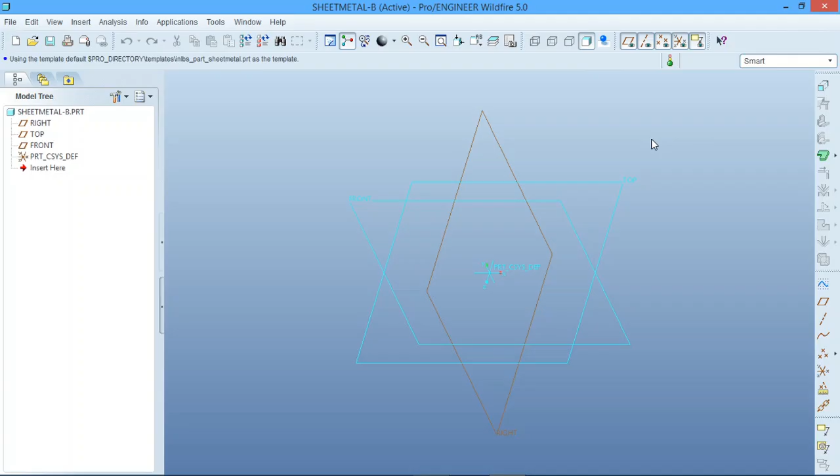First thing we're going to do is we're going to select our flat feature. Okay, so we're going to select sketch. Then we're going to select our datum plane. We're going to say sketch as always. Okay, we're going to do our center lines.

We're going to do a square as we've done before. I'm going to say select. We are going to say 300 by 300, just to keep it all symmetrical. I'm going to say okay.

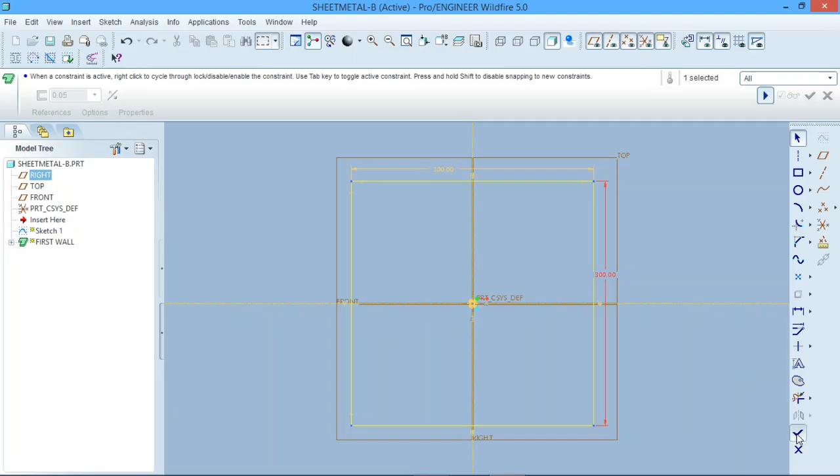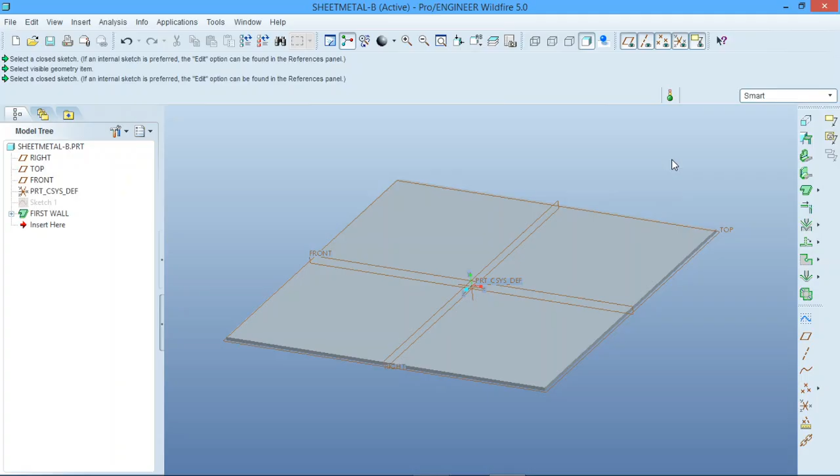Now the next thing we're going to do, I'm not going to run through the flat and the flange because we did that in part A. Or maybe I'll run through it later, but first we're going to do our bending tool. So what we're going to do is select bend, angle, regular. We're going to say done.

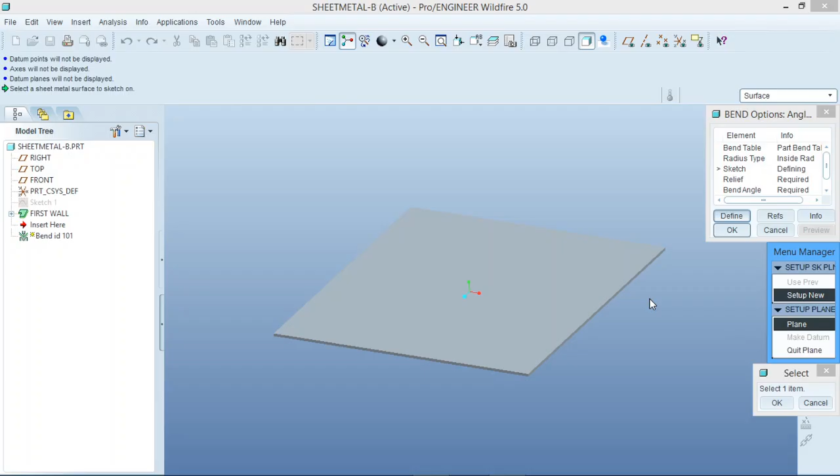We're going to say part bend. Say okay. Say inside radius, yes. Okay, now we're going to select the plane, select this plane here. We want to sketch that direction, so we're going to say okay, or if I didn't want to, I would say flip. Okay, we say okay. Which view would we like? Default, because that's where we're going to do our sketch.

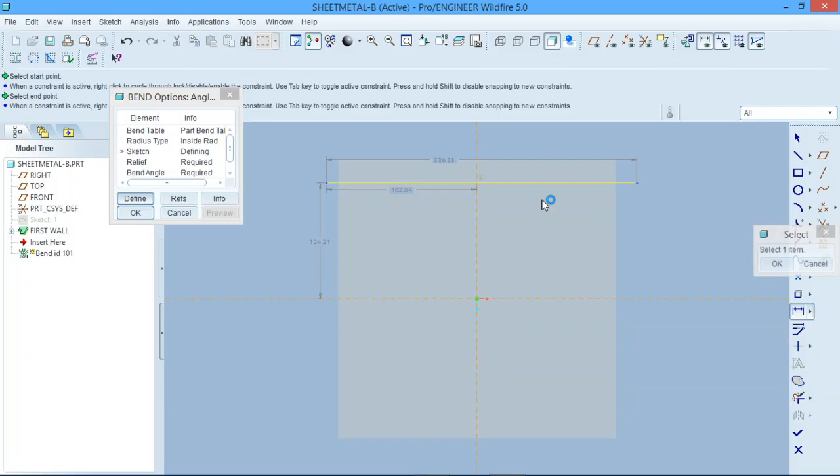Okay, so now I'm going to do a normal sketch. Now I need to put a dimension there to there, call it 25, say okay, say I'm happy with that. It is now asking me which side of the entity to create the feature, so that side. I'm going to say okay.

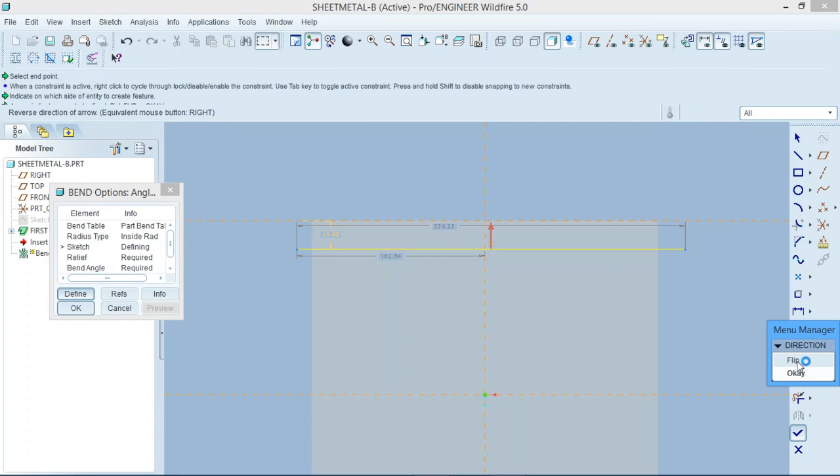We need to know which area will be fixed, so the arrow indicates the area to be fixed, so not that side. We want this to stay and the other side to bend, so we're going to say flip. We're going to say okay. No relief or with relief, well not always but with relief. Done. Rip relief, yes. Done.

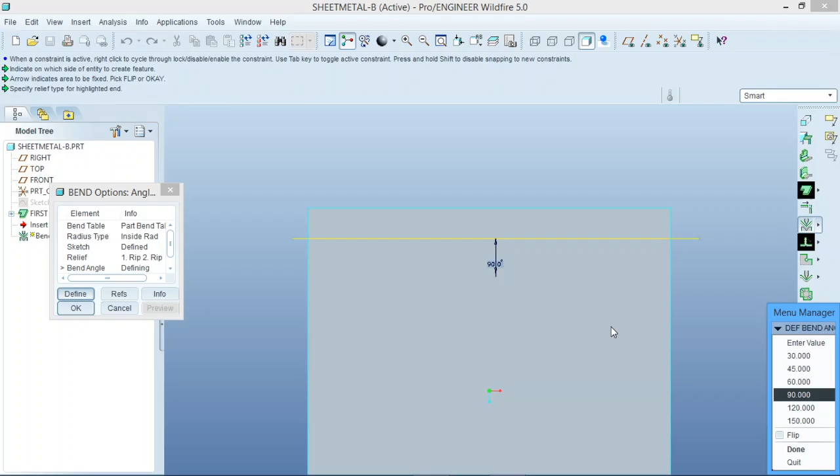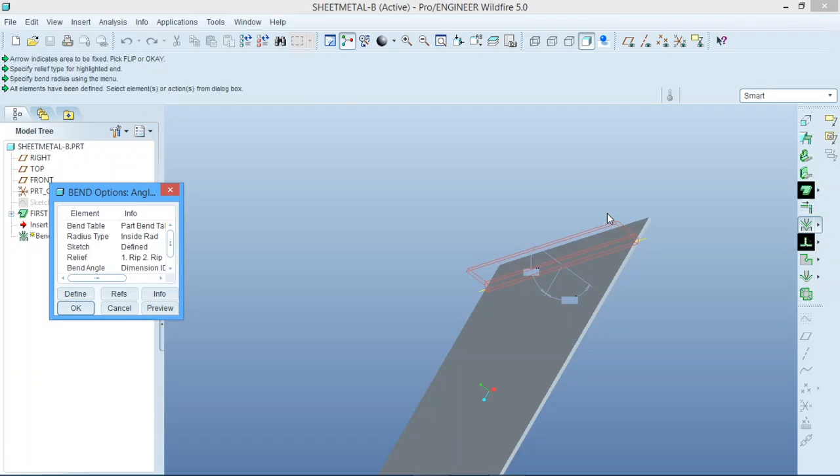90 degrees, yes, we want it 90 degrees. Let's see here. Now we're going to flip it the other way because we want it up. Say okay. We want the radius of the bend to be the thickness of our steel. And we can say preview. And there you can see there's the preview. So now all we do is we say okay.

That's very simple, nice little feature. Now I can show you your flat feature. So now we click here.

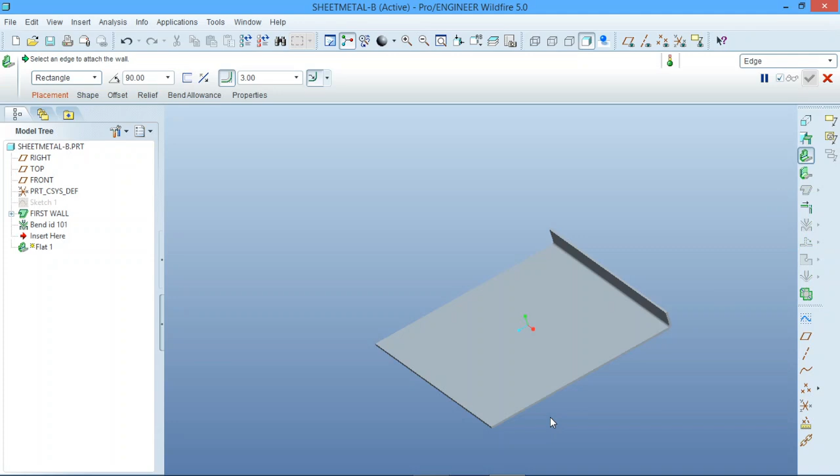We can use this. We go 25 here again. Okay, our radius is now inside, so what we want to do is we want to shift it to there.

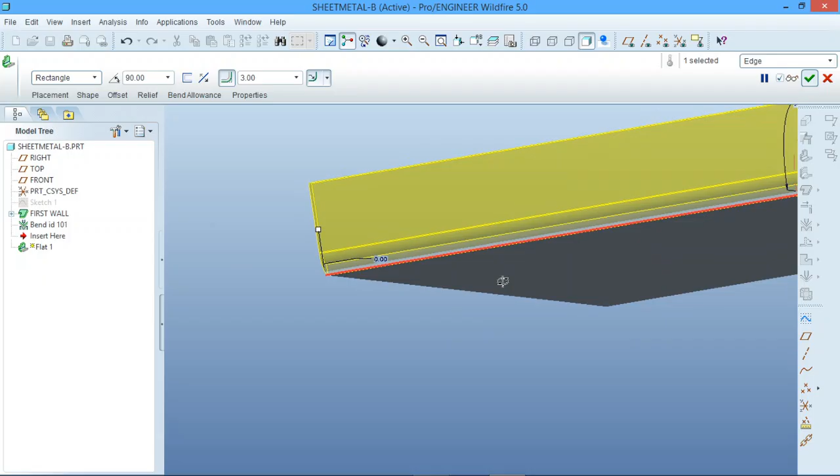We are going to have same height, same angle, and now we're going to do the other sides. So I'm going to select there to move it to the other side.

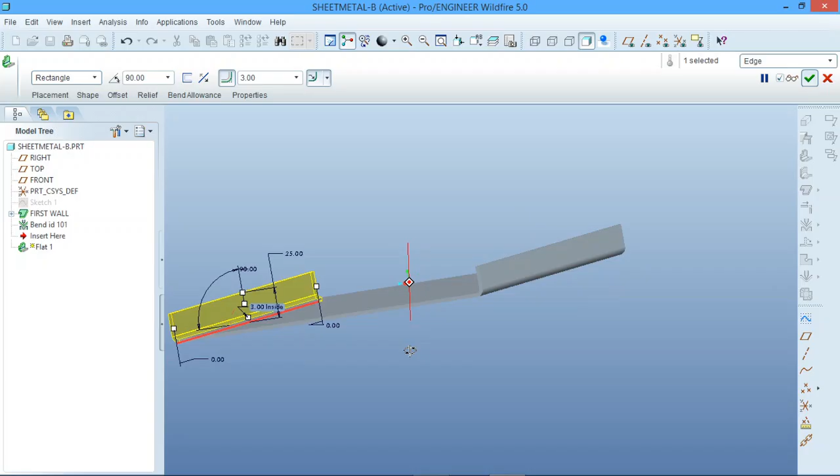Okay, we're going to say okay. Now those two sides should be identical.

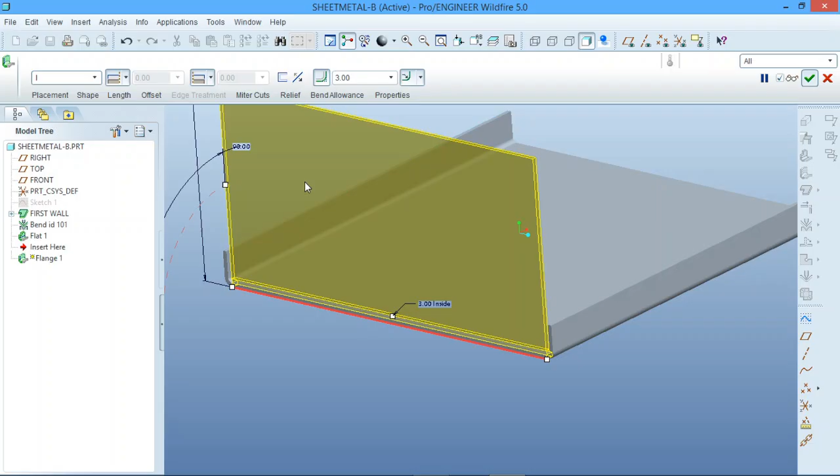Okay, so now the next one we're going to do is we are going to use our flange feature. So we're going to click there. Will give us that. Same thing, we just need to change that radius.

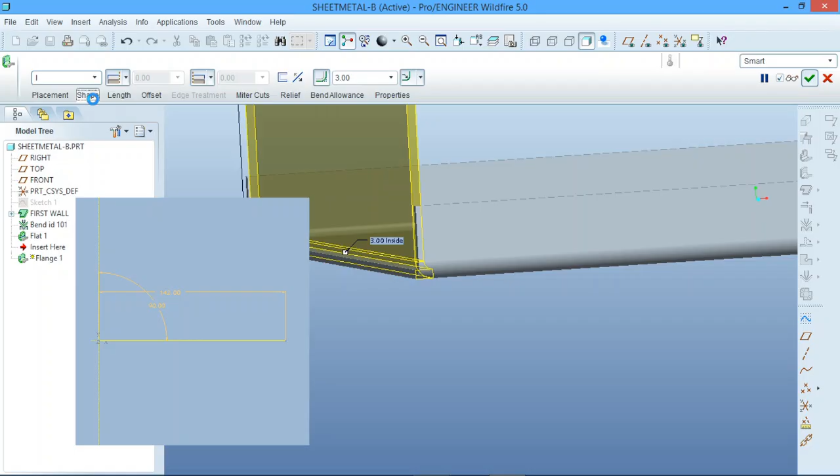As you can see there, it's toggling that radius. Okay, we want the shape, so we can say sketch, then we can say sketch, and we can give it the shape we want.

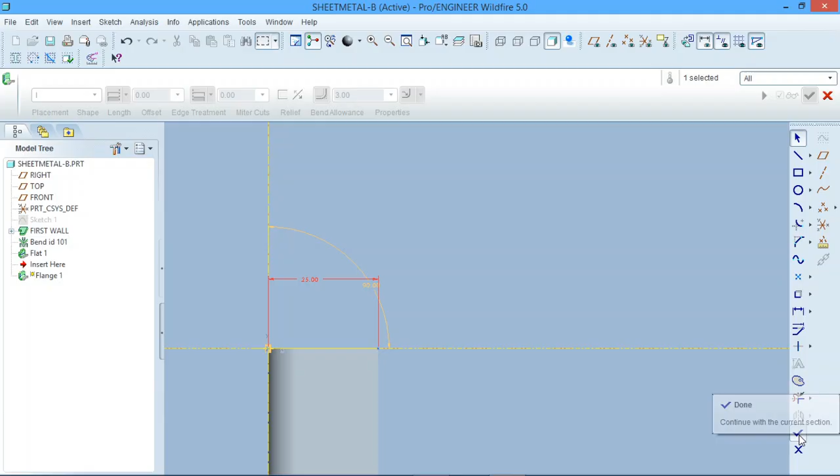So we want it 25 as per the other ones. We still want it 90 degrees. Then we say okay. Okay, now we are going to say okay.

Now we've got that flange. We are going to say flange. We're going to say insert. Edit. We're going to say mirror.

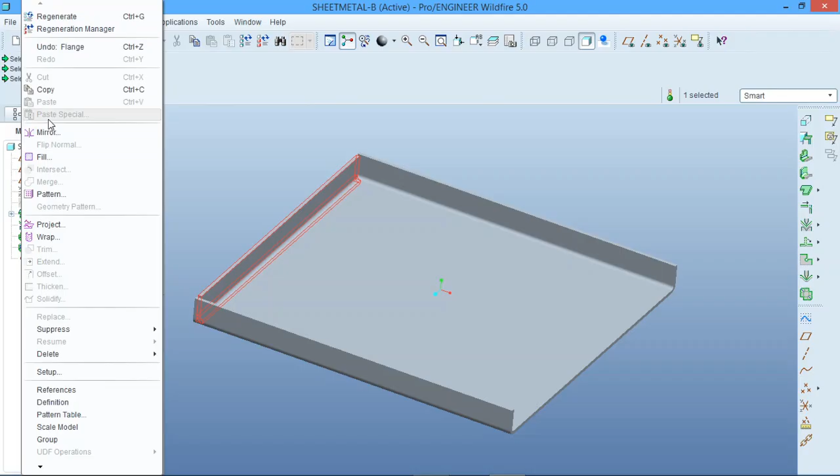I'm going to put our datums back on. I'm going to click on this datum plane. And we're going to say okay. And boom. Another one. Simple, easy.

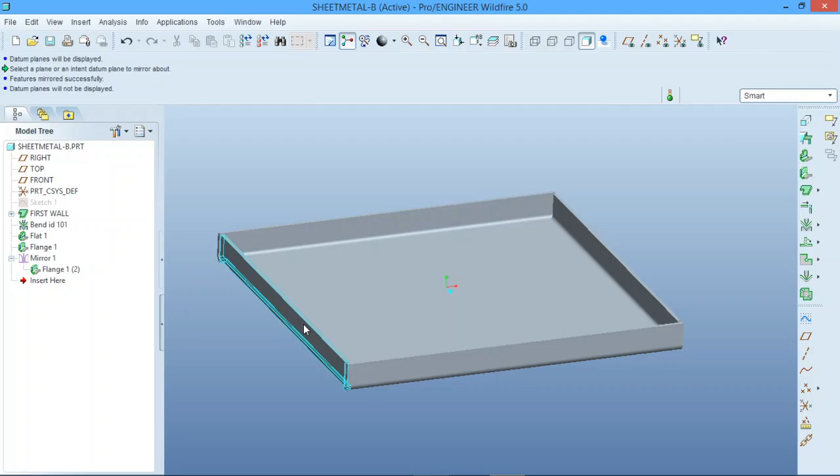Okay, so remember, this one now mimics this one. So if I go to this one and I say edit definition, and I change this to 45, okay, look there, changes it the same.

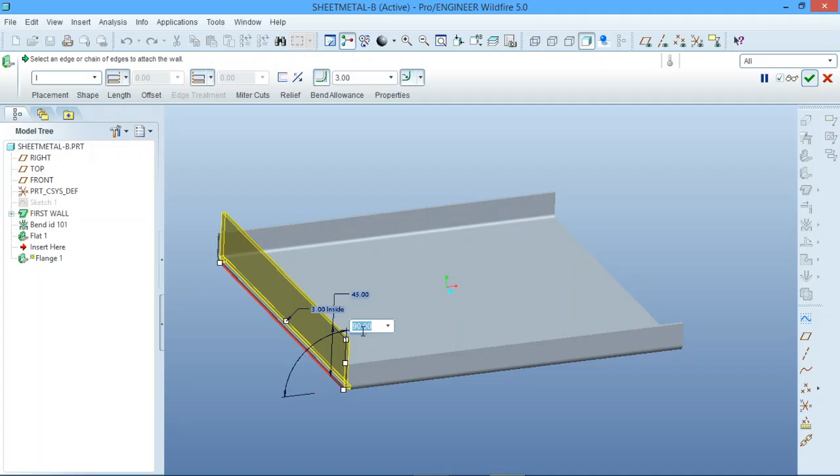If I go edit definition and I change this to 60, and I say okay, that one is also going to be 60.

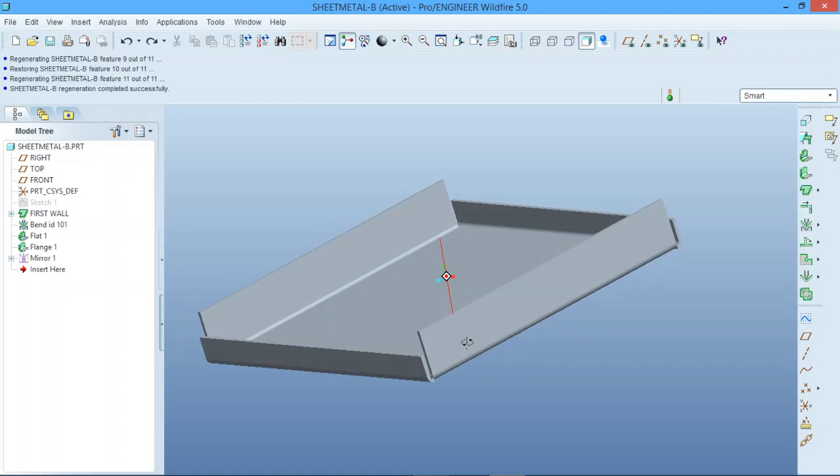Okay, so now we're going to go back to the 90. Okay, as you can see, there's our mirror feature and our flanges and our flat.

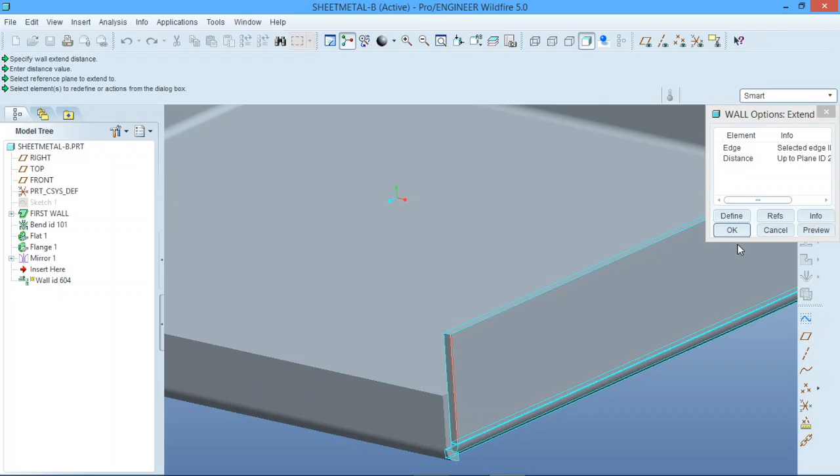So now if I go define edge, define, and I go instead, and I say distance, define, we can go up to a plane. I can select the back of that and we can say okay, and now we extended it to the other one. As you can see there, see the difference between the two.

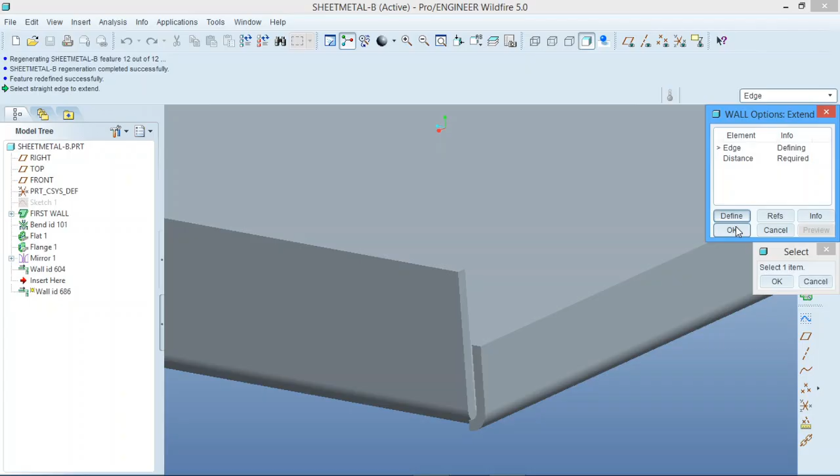So again, all I do is I go this side, I select my extend feature, I select this edge, I say up to plane, I select the inside of this, and I say okay, and you can see there again it has extended it to there.

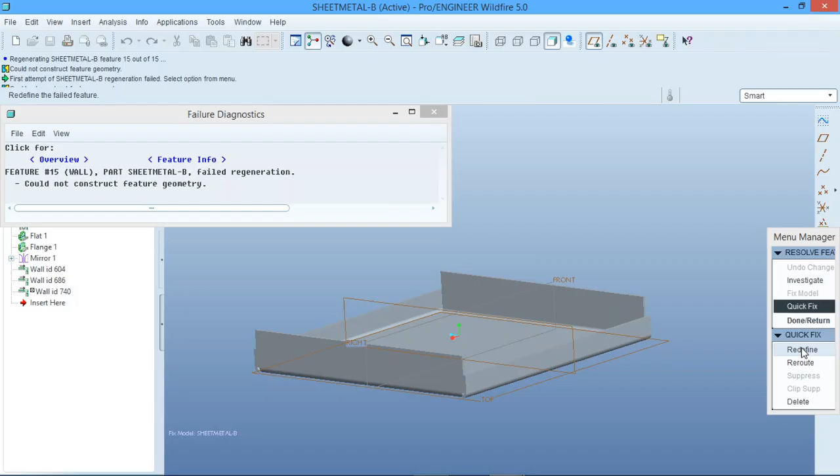So now if we go click on that one and we go edit, mirror, and we select that plane again, say okay, so we go this feature here, we say this feature here, and we say okay.

Simple. Same with this one. We go edit, mirror, select this, say okay.

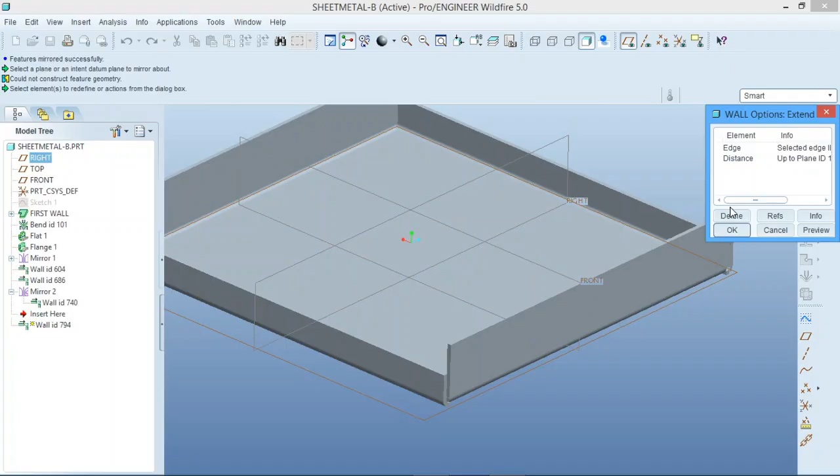Define the edge, define, this one, distance, define, inside, say okay, and there you go. So there's your extend feature.

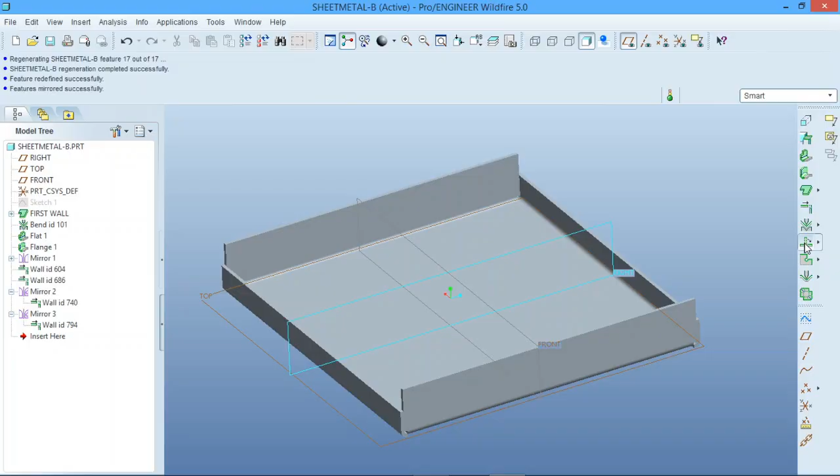Now the next one we're going to do is going to be your unbend feature. So we're going to click here, we're going to say regular unbend, we're going to click here, we're going to say done. It's going to say select a plane or edge to remain fixed while unbending, so we're going to select this one.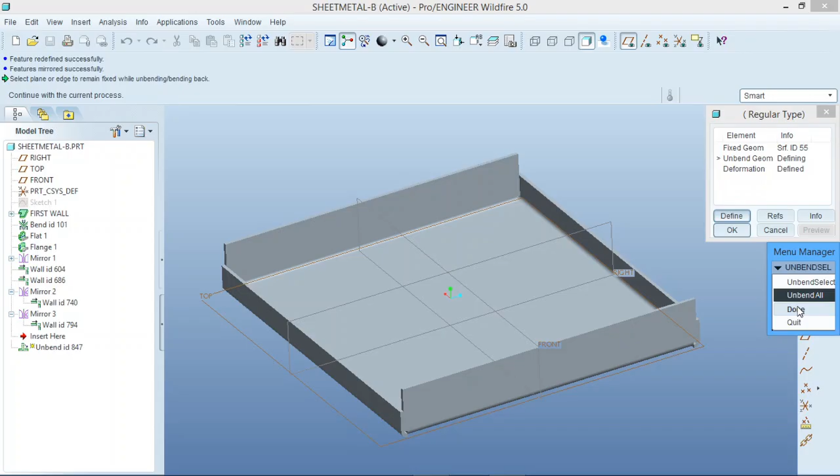We're going to say unbend all, okay, and we're going to say preview, and there would be your preview, so we're going to say okay.

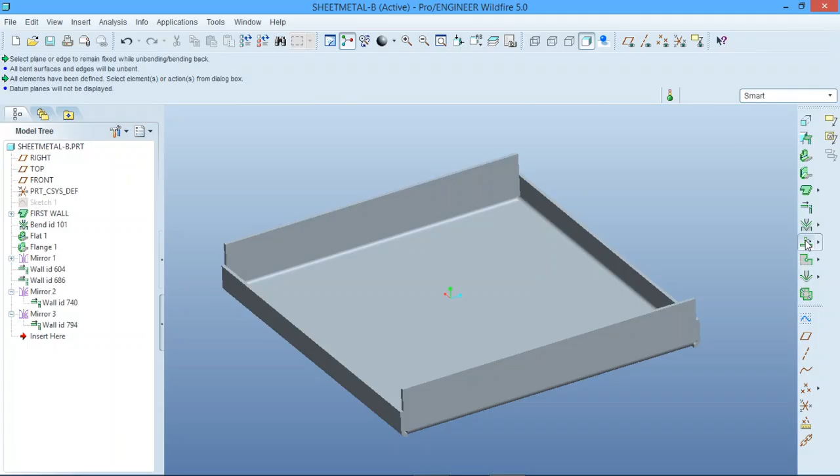As you can see, there's your flat now. Okay, so if I want to go back, I just suppress this, say okay. Say now I want to put in a different type of unbend, so say we go regular, say done.

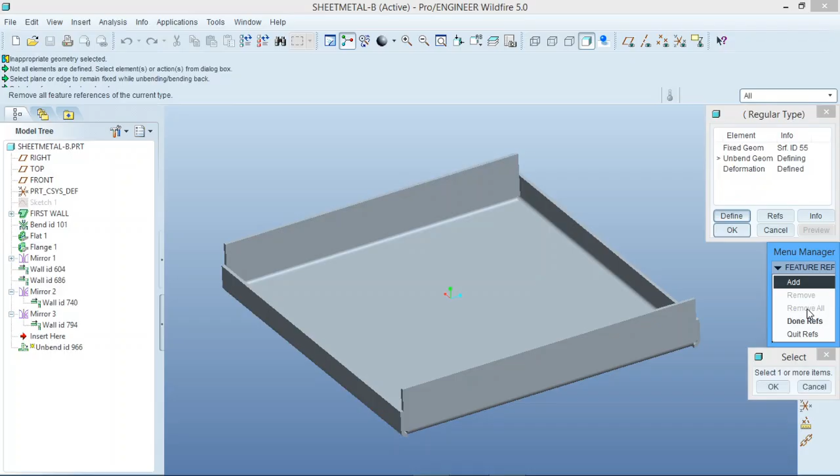Okay, so I'm going to define my fixed geometry, which is going to be this one. Then we're going to say unbend selected, yes, we're going to say yes. Then we're going to select this one. Okay, we're going to say okay, done, say okay. And there you go, there it's unbent.

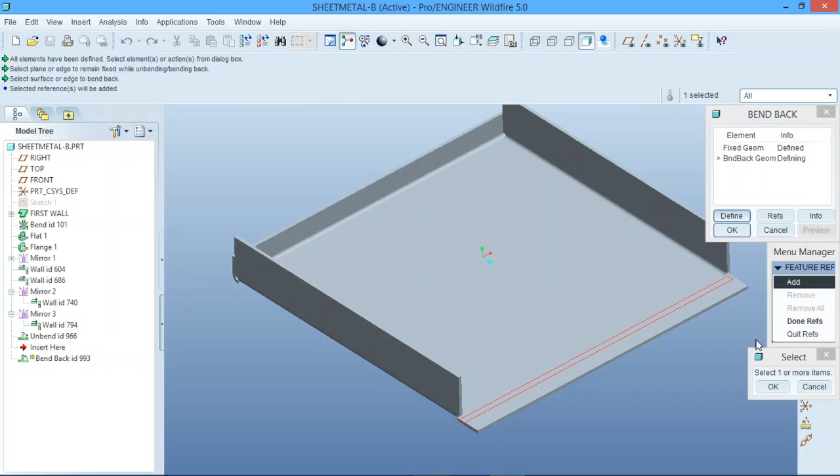And then again, if I want to bend it, okay, bend back, we say fixed geometry, that one, bend selected, done, on that bend, say okay, done refs, say okay.

Simple. It's a very nice feature. Depending on what you want to cut or do there, it's quite a nice feature as well.

So we've done our flat, we've done our flange, we've done our flat wall, we've done our extend, our bend, our unbend. So the next thing we're going to need is our corner relief.

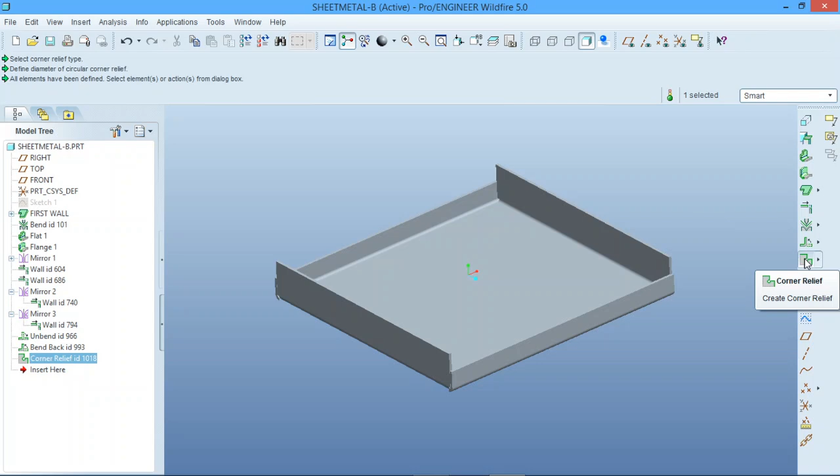That one generally works better on a different model, so for the corner relief I'm going to make a new model, new part, solid, okay, and we're going to do our usual extrude: sketch, plane, sketch, center line, and do a square.

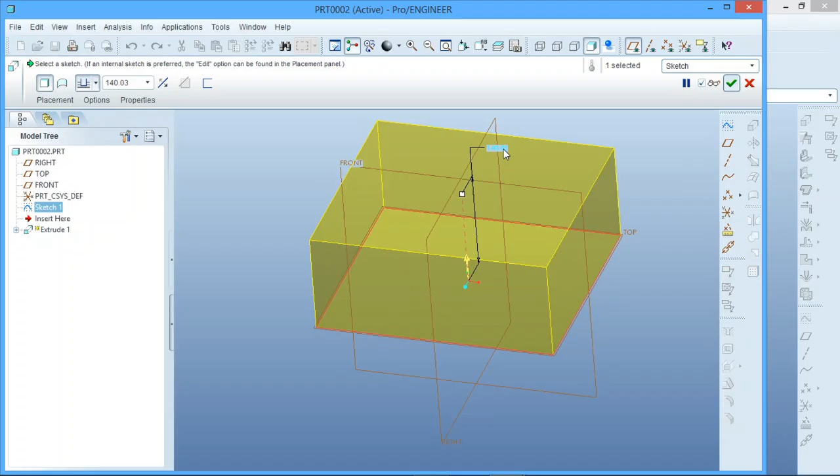I'm just going to do a basic one. I'm not even going to change the dimensions for you guys, I'm just going to leave it like that because it's actually mundane and I'm wasting your time, which I apologize for. So if we go 30, we say okay.

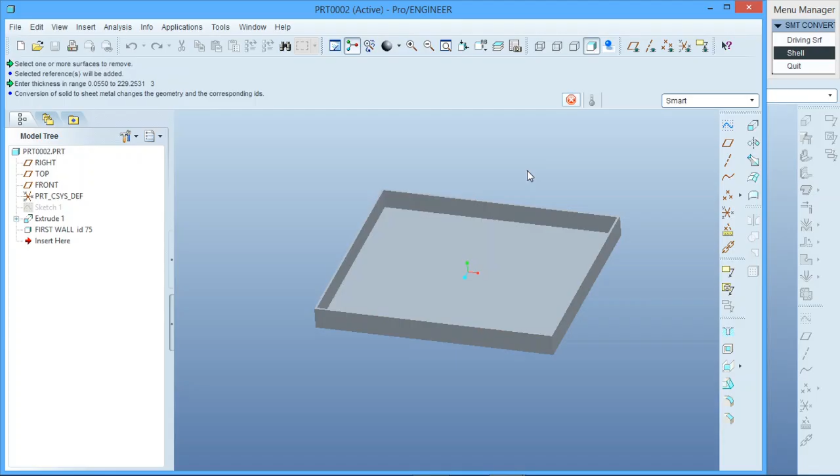We go remove planes, applications, sheet metal. We go shell, select the top there, say okay, done refs, and we're going to go 3mm. Okay, now we're back in sheet metal, as you can see.

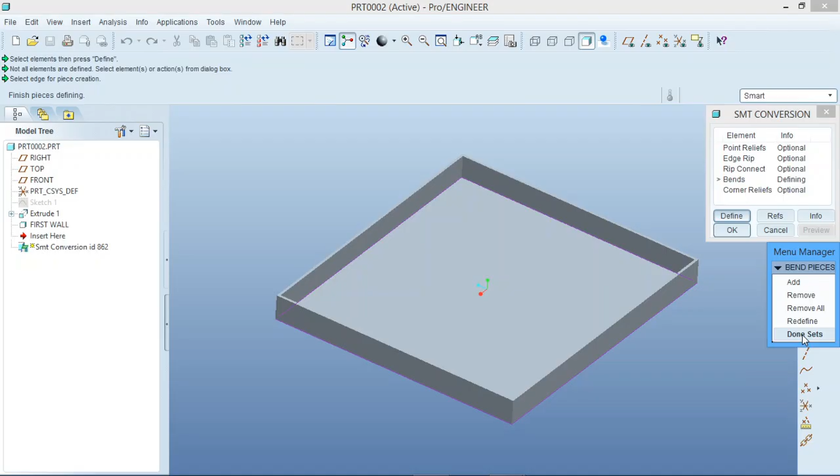So before we can use our corner relief here, we have to use our conversions. We're going to say bends, define, and click on these four corners right here. We say okay, done sets, okay.

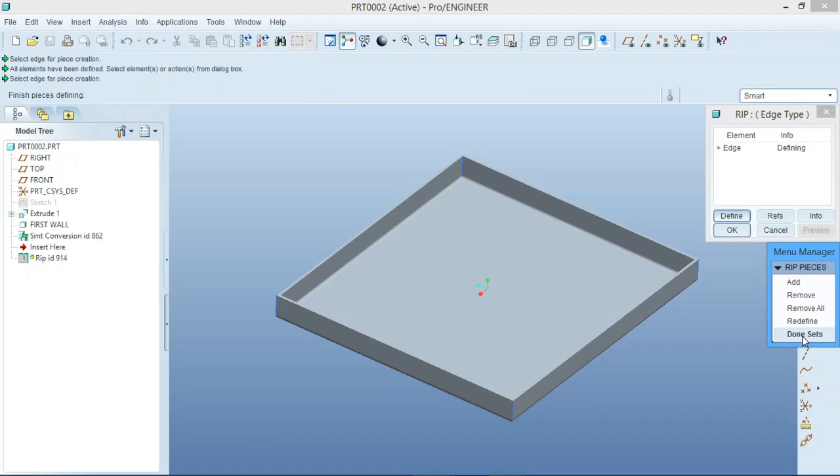Now we're going to go rip, edge rip, I'm going to say done. We're going to select that one, that one, that one, and that one. So okay, done sets. Okay, there's our rips, right?

So now if I want to flatten it, easy, go flat. As you've seen in the previous part of this video, we're going to fix geometry, select that one, say unbend all, say done, say okay, and there it's flat.

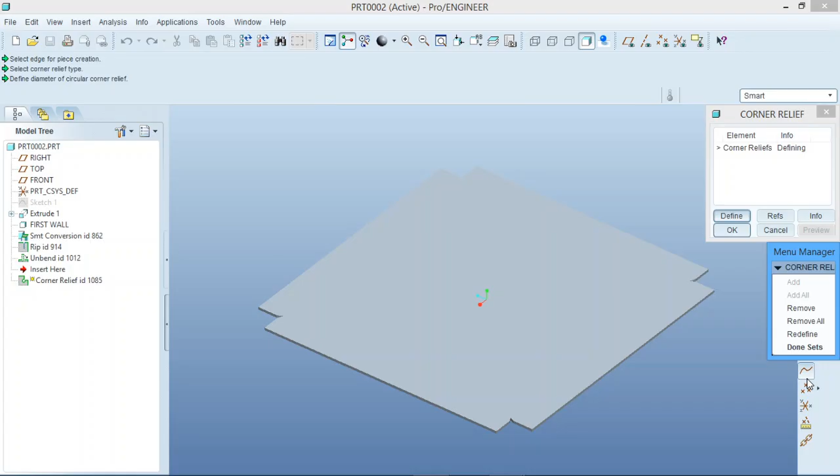Okay, now our relief feature, we're going to go corner relief. We're going to say all. Now you're going to have no relief, none, circular, or obround. So we're going to go with circular today, with the thickness of our steel, and say done, and we say okay.

Now, as you can see there, there's a hole. Now if I want to edit this, edit definition, corner relief, define. We're going to have all four corners there, so we can just select all.

Select all, I'm going to say done. We say define, with no relief, circular or obround.

So let's do obround now, and let's go double the thickness. We say okay, no, thickness times 2, say okay.

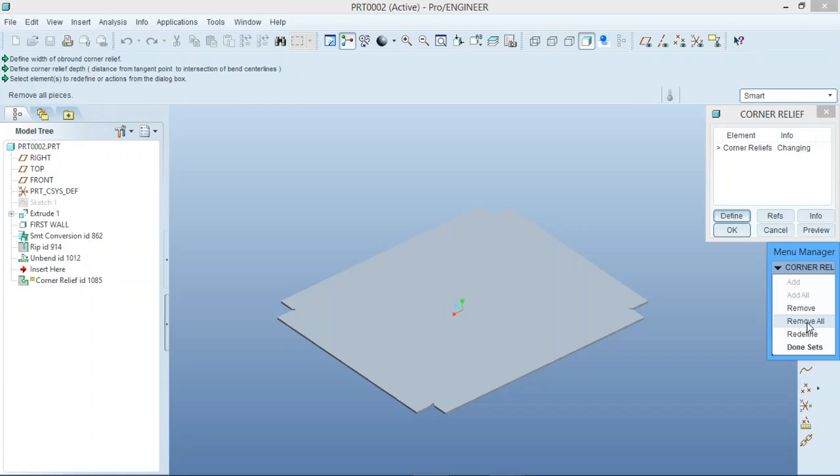Redefine the action, yes, done sets, say okay. As you can see there now it looks slightly different - now it's not a round hole, it's an oblong hole.

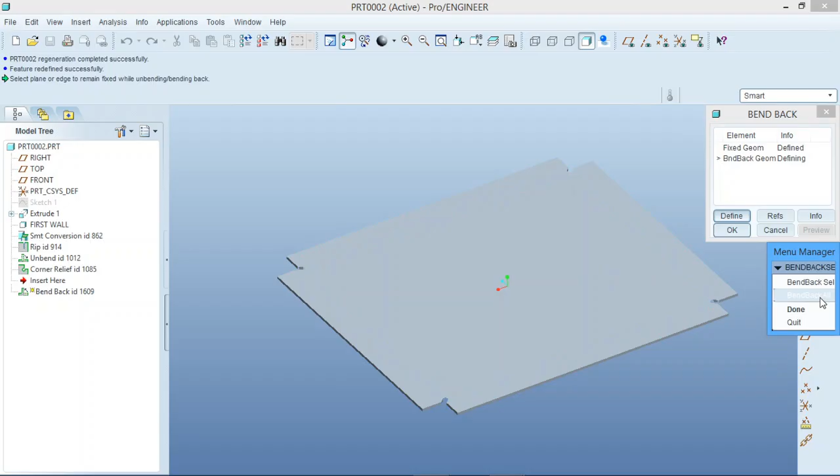So now if I go bend back and I say fix geometry, all, I say done, I say okay. Okay, there you can now see the difference.

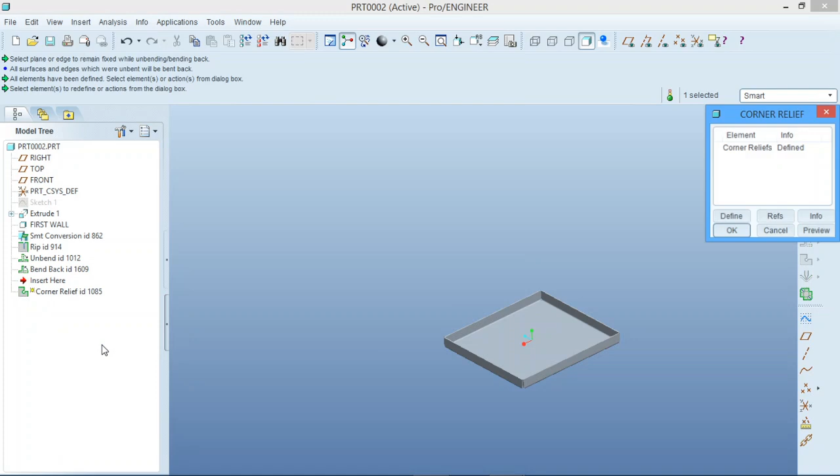Okay, if I'd made it even bigger - so if I'd gone corner relief here, edit definition, corner relief, define, select all, okay, say done, say again corner relief, define, we went obround and we went into value and we said 10 instead. Okay, we say okay, done sets, okay.

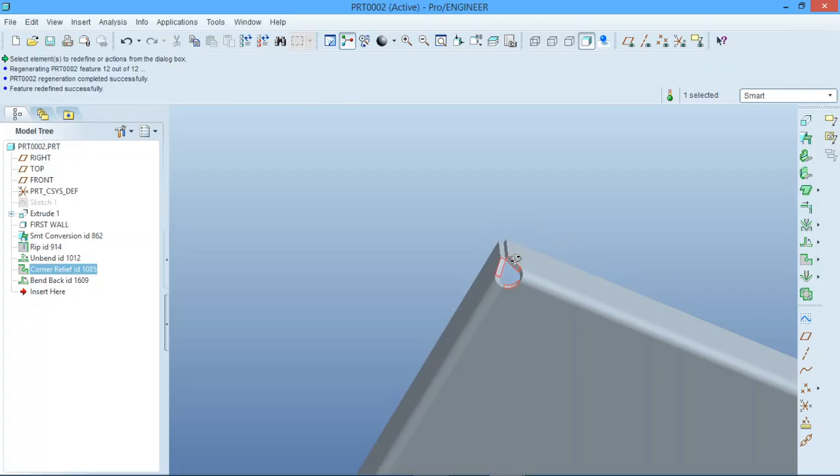See now there how big it is. So you can make it whatever size you want. So that is how easy it is to use your sheet metal tools.

If there's any other features that you guys need to know or want to know, you can just let me know. But I think now we've covered all the sheet metal except for the punching, which I'm going to do in a separate video on its own.

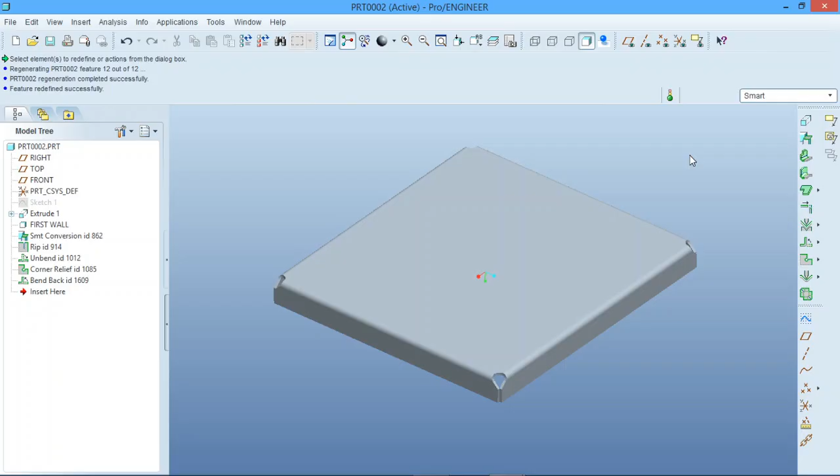I hope this was helpful, and I hope this makes stuff a bit easier for you.